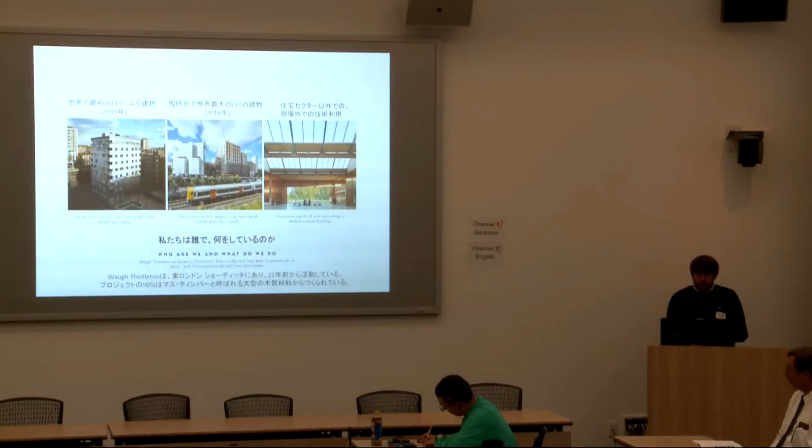That's meant we've also gone to try and see where else we can go with this idea, to build our buildings primarily out of solid wood rather than steel or concrete. To the right is actually a factory we've just completed, a furniture manufacturing facility also in England, made from laminated veneer lumber, a kind of mass timber column and beam system with CLT slabs. So a long journey from fairly simple and obvious buildings to much more complicated and specialist ones, all in the world of timber. To do that, we're only 30 people — our practice doesn't aspire to be hundreds and hundreds of staff. We want to remain experts in what we do and do it very, very well.

In order to do that as a small business, what we have to do is reach out and collaborate, do things like we're doing here today to try and teach some of the engineers and architects of the future, or the present as well, about the things that we do, but also to collaborate with world-leading institutes on research propositions and on ways to push forward the amount of knowledge in the industry.

I can't express enough how much that collegiate approach is important in this process. If what you're trying to ask people to do is something that you really think they should, but that they don't necessarily want to, you don't do that by shouting and by telling people they're wrong. You do that through debate, through evidence, and through careful working together.

We also work very closely with policymakers, and this was touched on a little bit this morning. One of the main reasons that we have a context for building in mass timber in the UK, and we now have nearly 500 CLT buildings in the UK, is because we've all been able to start to have productive conversations with policymakers. As a business, I work as a design reviewer in a local municipality to help them decide whether planning applications are of the appropriate quality. We work with national government organisations like CABE, who go out and do that on a national scale, and we also lobby hard to change the policy that decides what sorts of buildings we have, in order to make this meaningful change to think about embodied carbon as well as carbon that's emitted in use. You can see some of the sorts of documents and bodies that we contribute to on this screen.

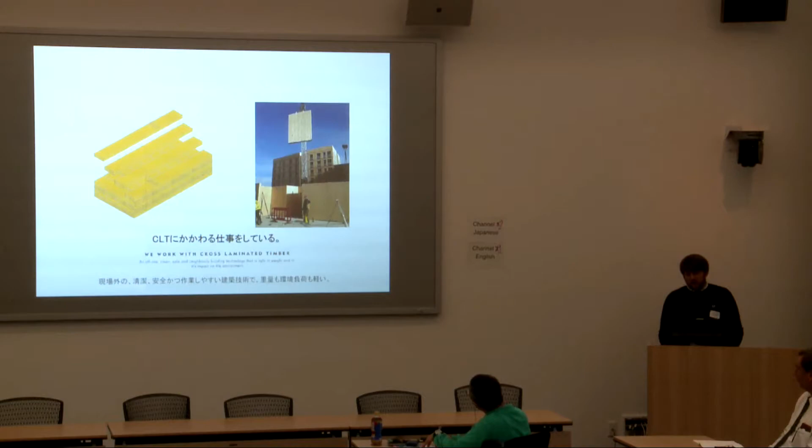So why did we get interested in this? Well, one of the key things in the UK is that we have a chronic shortage of housing. So not only are we doing lots and lots of building, which is causing lots and lots of carbon to be emitted, but also we're not doing enough of it, so we're going to be doing some more.

Our outlook was to say, well, hold on, if we need an extra 200,000 homes a year on top of what we build today, if we continue to do that in the way we always have, that's essentially the same as putting an extra 2 million cars on the road in terms of the amount of carbon we're emitting in the atmosphere. So while we're building a whole set of government policy to reduce emissions from cars, make them more efficient, provide public transport, take them off the road, it seems completely ridiculous to us that we would allow other parts of policy to do the exact opposite. We must have more houses, therefore we must emit more carbon. That seemed counterintuitive to us.

So we were very keen to think about what components of the construction industry were at fault for that. And what we found was that the prime candidates were cement, clay, concrete products, steel as well, those that take a lot of energy to take out of the ground, to make into something else, and actually a heck of a lot of energy to get rid of again in the future.

The principle for us was to say, well, hold on, not only should we be omitting those, we should be replacing them with something better. The obvious answer to us was to start working with timber. So not only are we taking materials out of buildings that cause a great deal of energy to be used and carbon emitted, what we're putting in its place is a product that actively takes carbon out of the atmosphere during the key 30 years of its growth cycle. What we're doing is locking that carbon away in the building for its life cycle, a process we call sequestration. This to us seemed an absolute no-brainer.

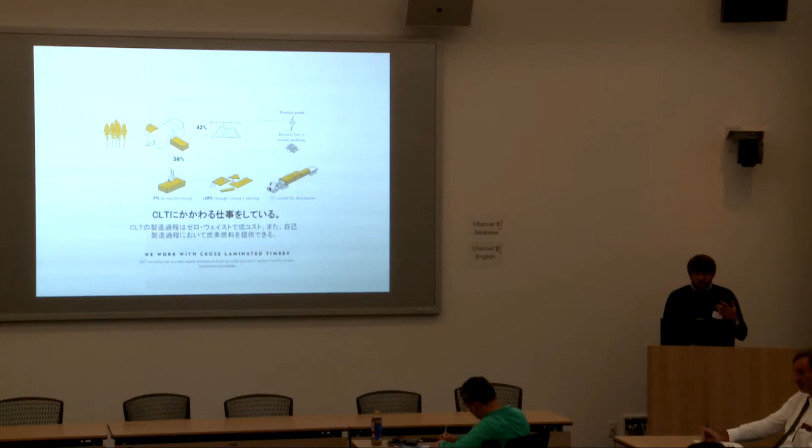Firstly, the majority of the suppliers in Austria are family businesses. They own their entire supply chain, all the way from a tree in a forest to what they traditionally send out as dimensionally stable products like softwood, cut planks, fence posts, and things like that. But in order to have a good and efficient business, they had always invested in circular processes. So their offcuts go to bark and wood chips for flooring in playgrounds, or go to biomass fuel to heat their own factories. Those same principles are applied to the process they now use to make and press CLT panels, forming them to the right size for building sites. So even within their own processes, what we're looking at is something with a very light touch on the environment and a very light touch in terms of waste produced.

The other thing we like, which I'll touch on a bit in terms of the UK context in a moment, is the fact that we're putting these processes into a factory. That means we're producing things that are much more dimensionally accurate and much higher quality. Every time we make a timber frame in the traditional way, we attach hundreds of small components together. And if we do that in the wind and rain on a building site, every joint is an opportunity to make a mistake, to have a poor quality building, to lose air or heat, all those things we were talking about this morning regarding passive construction principles.

If we make our materials out of 3 meter wide, 6 meter long solid timber panels, pressed in a factory and cut to 2 millimeter tolerance on a laser guided CNC machine, we've vastly reduced the potential for error and reduction in quality. There are some other great benefits which are probably best touched on in a second.

But actually, the next phase of what we're working on in the UK is to go beyond simply making panels in the factory, to do something familiar in the Japanese market but much less so in Europe, which is to make whole modular housing blocks, fitting kitchens and plasterboard, doing all those things in the factory, but doing it with CLT.

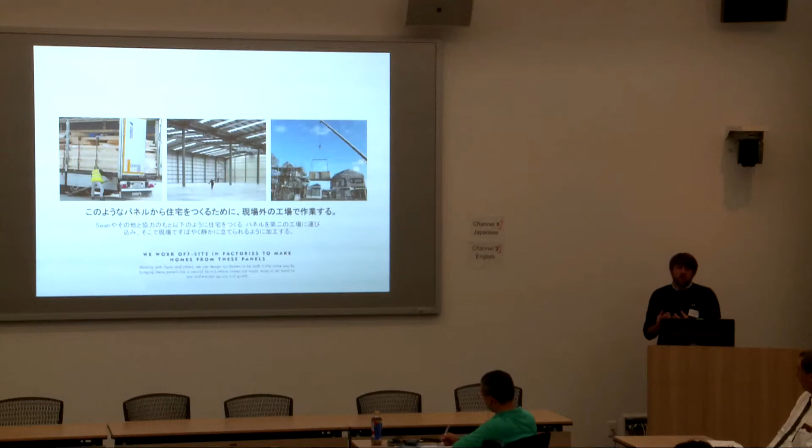Because I think the failure we've made in trying to mechanize the construction industry is that we've been trying to design machines that replicate processes designed for humans. We're trying to make robots that manipulate thousands of little bricks shaped and weighted for a human hand. It seems absolutely crazy when what we should be doing is feeding machines and robots large format products that already exist, that machines can handle more easily and that can be cut to very tight tolerances.

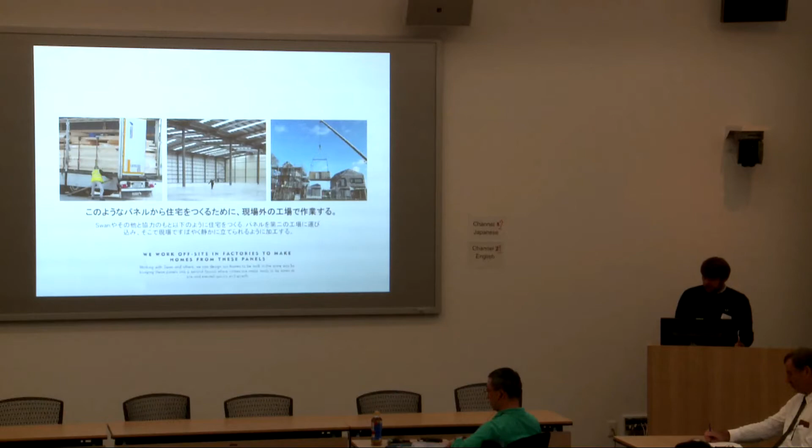So we're now at the vanguard, working with two major suppliers in the UK of building CNC cut modular volumetric housing systems. So why is this important? Well, we've touched on it a little, but I think it's interesting to understand what that means in the context of the UK market.

Why is the UK a place where only 500 CLT homes have been built, maybe even fewer than in markets like Austria and Germany where a lot of the timber comes from? Well, firstly, in the UK we aren't building enough homes, and because we're not building enough homes, homes are too expensive.

I won't try to do the maths in my head from pounds sterling to yen, but on the right we have a home considered affordable. It's for shared ownership, meaning a young person can buy a quarter of the home and pay rent on the remaining three-quarters. The whole value of that home is £1 million, for a two-bedroom flat. That is not by anybody's measure affordable.

So this is the situation we need to address in the UK. There are lots of reasons for that, but those reasons are also connected to the way that we either do or do not innovate.

Actually, we have lots of planning consents, permission to build all these homes. We have planning consents for nearly 615,000 homes, but they're held by 7 really big companies. And those big companies only actually started 150,000 homes that same year, and they finished 66,000.

So what we have is this weird situation where these big companies own the housing stock, the market, but they're disincentivized. They have no good reason to build all these homes, because all they would then do is devalue their £1 million homes. A bit of a crazy situation.

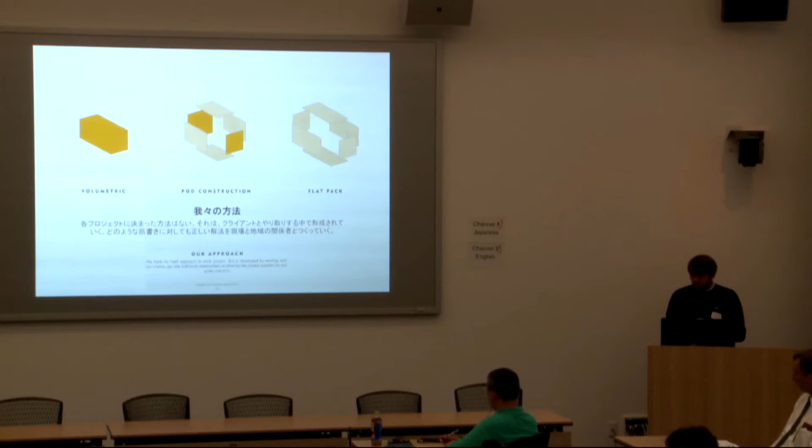Here's an example of a volumetric building we're working on at the moment. This goes on site at the end of the year. It's for a housing association, so this is affordable housing for people who don't have a great deal of money. This company is called NU Living, with Swan as their parent company, and they've invested in building a factory to build all the homes they'll provide for their affordable tenants over the next 10 years. They think they'll pay off that factory, in terms of quicker and better construction without failures needing remediation, in about 5 years. We've just designed their first multi-storey product—they're already building individual two-storey homes. This will be the tallest volumetric modular building in timber in the UK.

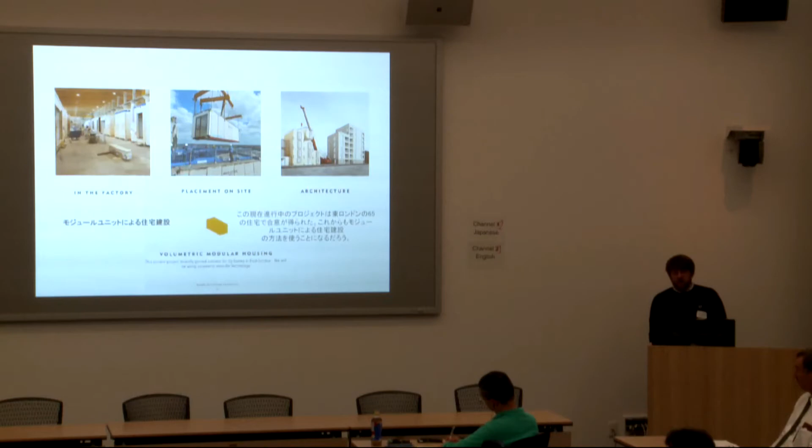We've designed the system from scratch, all the connections. We're codifying that, turning it into a document for other architects to use. It's simply about making a good set of decisions.

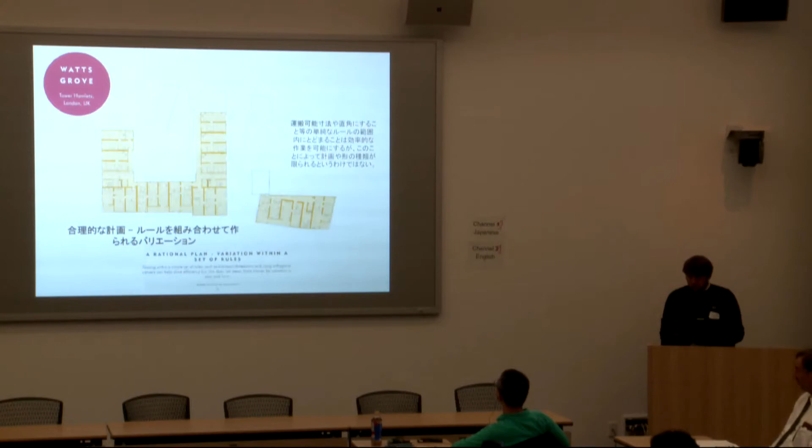What we have here is quite a regular building, with lots of right angles. But by making careful decisions and manipulating the mass, designing from first principles to have a modular building, all the architectural changes in composition come from big moves in plan or cross-section. We're not pushing things in and out ever so slightly. We're choosing things that work with the innate characteristics of the material.

We're choosing materials that are light and that hang from the timber. It's very silly to make a lightweight building and put heavyweight things on the outside of it, but you'll see that we've done that too, just to keep ourselves entertained.

We're also designing ways that we aren't constrained by the size of the back of a lorry. The diagram at the bottom right explains how we make homes larger than that individual box. For this site, for this client who wanted to build their own factory and invest in a process, volumetric modular was exactly the right answer - affordable homes, repetitive, but high quality and safe.

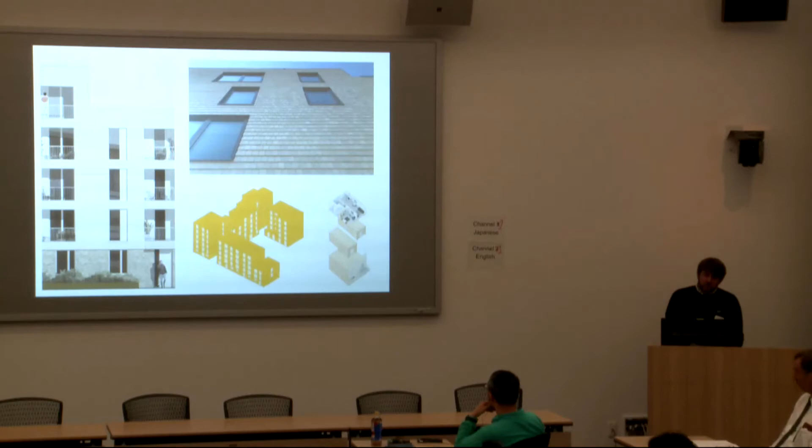For a different kind of project on a very dense urban site in East London, what we need is something that can accept the idea that every home is different in plan, so we can squeeze the most homes onto that site to get the best value in central London.

Here, interestingly, by building out of timber, we were able to put 2 whole extra stories on the building. You can see on the photo on the right, there's a train line - both an existing one and a proposed one that run directly under the building. So the whole 10 stories of that construction at its tallest part are supported on a 900mm thick raft foundation. It doesn't have long piles going into the ground to support it - it's simply one slab, 900mm thick. We couldn't have done that in concrete and made that site viable.

Alongside conversations about what we should do, how we should approach sustainability - things that frankly quite a lot of our clients don't really care about - we need to also ask: what if we could build this building 20% faster, so you pay the bank 20% less on the money you borrowed to build it? What if you could have 25 to 35% more homes on the site? Do you want to work in timber now? The answer invariably is yes.

So when we designed this building, you can see we have many fewer right-angle corners. This is not a simply organised building - it's very, very tightly planned. There are some careful architectural devices at work.

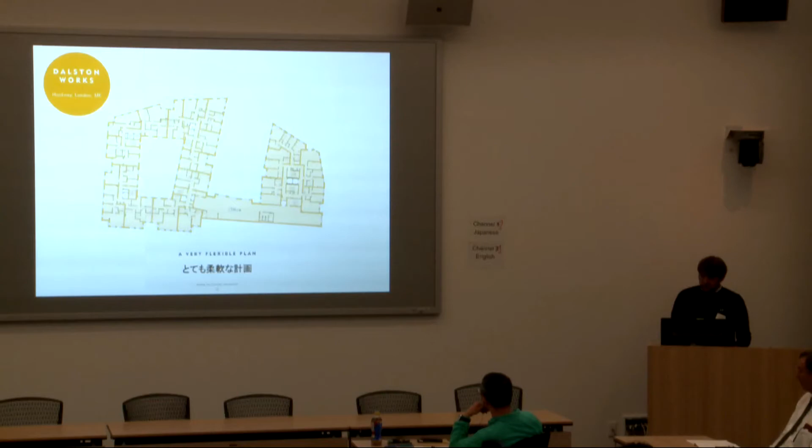We're also very careful to provide the maximum number of dual aspect homes we can, so breezes can go through the entire home to cool it in summer. The aim here is to have a technology that allows us to continue to be conscientious architects designing high quality buildings appropriate for their context. There's no conflict between building in timber and high quality, flexible architecture.

Here you can see the building under construction. In terms of the volume of timber, this is the largest cross-laminated timber building in the world. It is maybe the tallest panelised timber building - there are many taller ones, like one some of you may know in Vancouver that's 18 stories, made from columns and beams with CLT floors.

This building is made from CLT panels all the way from the first floor slab, which is a concrete deck - everything above that, including the walls forming the stair and lift shaft, even the stair flights themselves, is CLT brought from Austria. It's 121 homes, plus an additional 3,500 square metres of office space in a multi-storey office block at the centre. Viewed from above, you can see the scale.

There are 7 separate vertical circulation cores, which I guess helps understand the scale of the building.

Part of the narrative was for us to demonstrate to our client that they could have it quicker, they could have more, they could make their money, but they could have the product they were used to selling. So it's a sad thing in many cases, but a lot of our buildings, we don't expose a lot of the timber structure we create. Whilst that is sad, our aim is to do the most building possible in ways that are low in embodied carbon and high in sequestered carbon. So if we can convince a normal developer to produce his normal building from this technology, that is a vast success for us before we start to think about the beauty and qualities of the material.

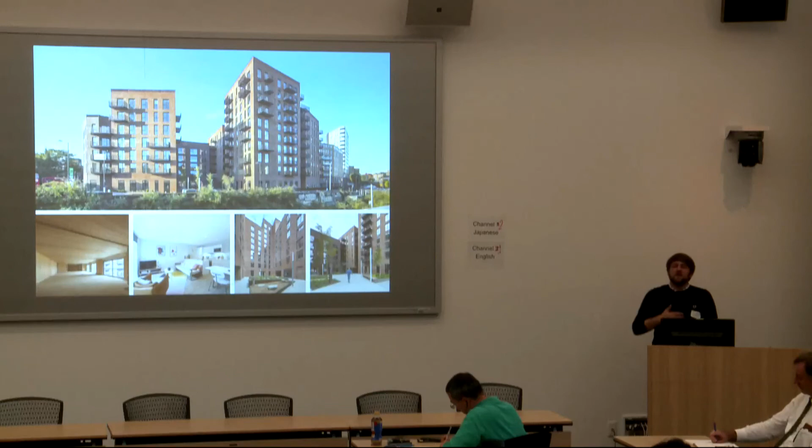And don't worry, there's a few of those too. At the bottom left, you can see an image of some of the office space there. When it was completed, the timber surfaces were left exposed. But to the right, you can see just an average everyday home that's exactly the same as all the others in London.

And also, we could prove that if you really do want to hang heavy stuff on the outside of our lightweight building, well, you can do that too. So this whole building is clad in bricks. We have a strong affection for bricks in the UK, and London specifically. So to be able to prove to our clients that they could have what they wanted, whilst slightly counterintuitive, was a really important thing to be able to achieve.

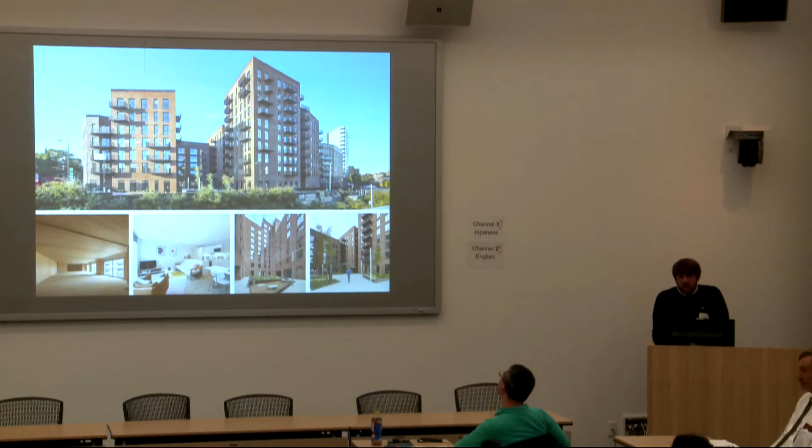So here are some key statistics. We've talked about how many fewer homes we might have built had we been building in concrete. But also there's lots of benefits for the community too.

When you deliver wet materials that need to be kept alive as they move from the plant to the construction site, like concrete, firstly you generate lots and lots of journeys. So if you live next door to a building site that's made from concrete, you've constantly got dust and dirt and lorries arriving every half an hour with fresh batches of concrete.

Also, once they've finished, all you've got are columns and slabs. Now, for a building this size, to do all the columns and slabs in concrete, we would have required 700 deliveries to site, and noise and clanking and pumping and all that noise. In order to deliver the CLT building, we needed only 111 deliveries.

But, by the way, what you get is all the external walls, a large proportion of the internal walls, the shaft that carries the lift and stairs, the staircases themselves, all in that 80% fewer deliveries that we make to site. And all erected by a small team of tradespeople with electric drills, not jackhammers, not pumps, not loud noises. So if we're going to carry on building in dense urban environments, we want to do it quickly, we want to do it quietly, we want to do it in a way that is appropriate to its context. So CLT can really help us with that.

In the building structure, there are 2,325 trees worth of timber, give or take. It's a bit of an estimate. But one of the first questions I'm asked is, well, okay, but what about all this cutting trees down? Surely that's bad, isn't it? So we worked with Binderholz, who are the company who supplied the CLT to build this project, and they estimated that from the Austrian forest where they grew the timber, that's the equivalent of about 3 hours timber growth.

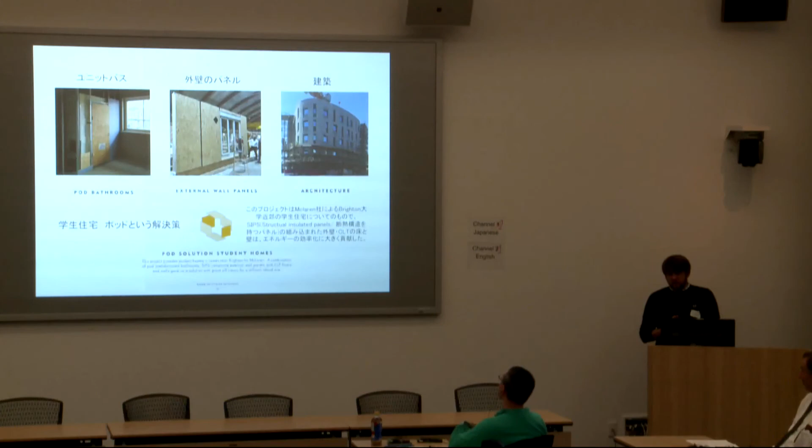So does that mean then, if we're going to do all these different bits of off-site things, that we have to have square, boring buildings? Well, hopefully you can see emerging on the right something that's not that. But I'll show you in a second, that's the product of a series of very careful individual decisions.

So this site was on essentially a traffic roundabout. We had to build very quickly. We had to do it as quietly as possible. It's student housing, so we had to be finished by the beginning of term, or else there would have been a lot of students sleeping on the streets, which is not anything that I'm sure anybody in this room wants to think about. So what we did was we combined the right technologies for the right jobs.

We needed to save space, use the maximum amount of the wall, so the hybrid of timber frame technology with insulation inside it was great for our external walls. CLT is what we used for the walls coloured in yellow and for the floor decks, because we know that we can get all our structure, deliver it quickly, and erect it accurately without stopping the traffic too much. All those things can be really quite flexible so long as we design within constraints.

So you can see that there are a variety of different room shapes, and a variety of different shapes and sizes and holes in walls that are made from CLT. So we're choosing the right products to achieve the right elements of flexibility. Whilst what we've tried to do is make all the pod bathrooms, apart from the wheelchair accessible one, identical. So in the factory where we're buying a repetitive product, we're not looking for that.

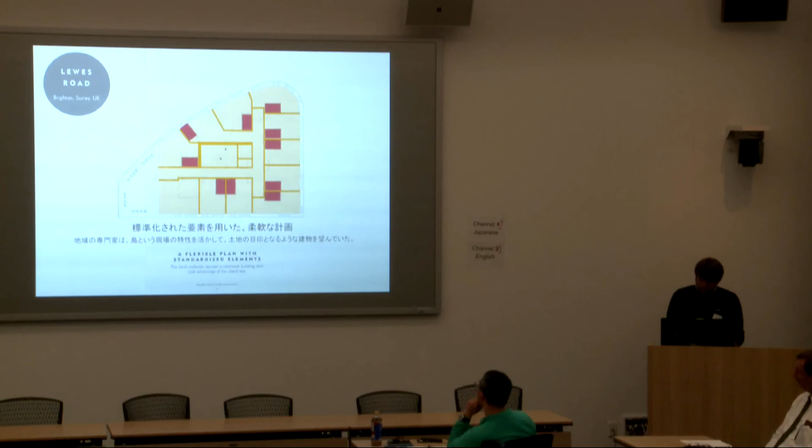So what it shows is that by mixing different materials and different processes, we can get the right things that we need for any individual project. Here, for example, it was really effective to be able to cut out all the routes for cables and for sockets in the factory to help us with that super quick construction program, because in a student project, we're not looking to change or reconfigure that in the future, whereas we might not have made those decisions for homes that we were going to sell.

So every time we're approaching a project in a unique way with the palette of tools that we have to design in a low carbon, efficient, nice place to work kind of way, and compiling them to make the buildings that we want. Here you can see those external wall panels brought to site with membranes on, lifted and placed on top of each other, and what we've got inside is then an environment where we can work the day after.

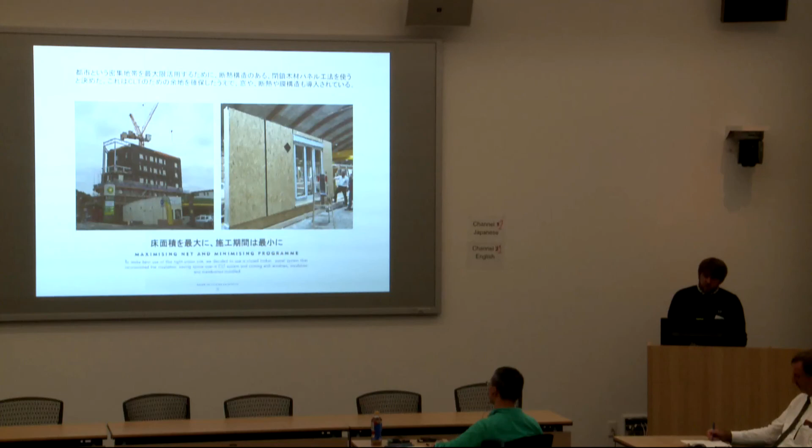When we make concrete buildings, it takes 28 days for a concrete slab to become incredibly hard and ready to work on, ready to load your building materials onto even. So whilst you can accelerate that slightly, every time you pour a floor of concrete, you have to wait before you can start building. If you build in timber and timber hybrid technologies, the day after you put the walls and floors up, you can be putting plasterboard, pipework, finishing that building—all of which contributes to a much quicker process, as well as all those other benefits in terms of sustainability.

And here you can see, as a practice, we don't have a phobia against the normal things we make buildings out of. If they're the right choice, that's what we do. So in between all these great off-site timber technologies, all those strange corners, all those odd junctions, those are made out of the things that in the UK we make the majority of our buildings out of, which is lightweight metal stud work.